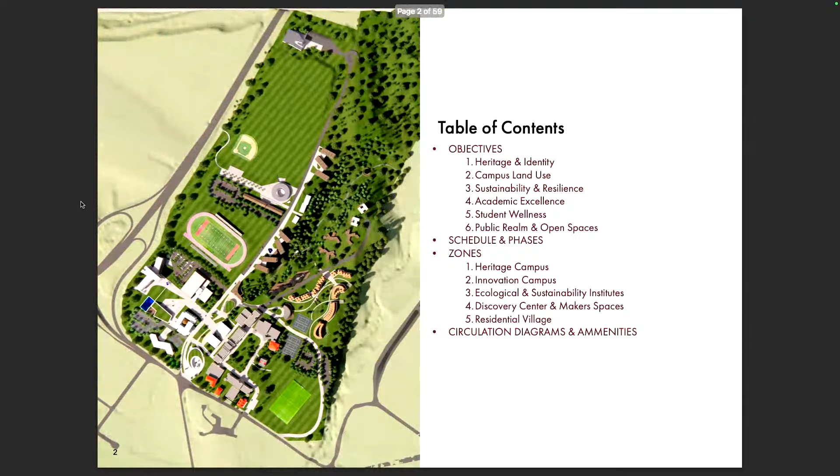Here's the overall plan. The basic objectives of this master plan is to really keep as much of the campus as possible and to reintegrate it into a new campus. Our goal is to maintain the heritage and identity of NYMA, but then build upon it with a new campus.

That's going to expand to ultimately 1,500 students over the next 10 plus years to reinvigorate the school for academic excellence. One of the main things we want to say is that in expanding the school, we want to be able to use the entirety of the campus, which is about 100 acres, to invigorate portions of the land that haven't been used before, to activate the natural landscape that's there.

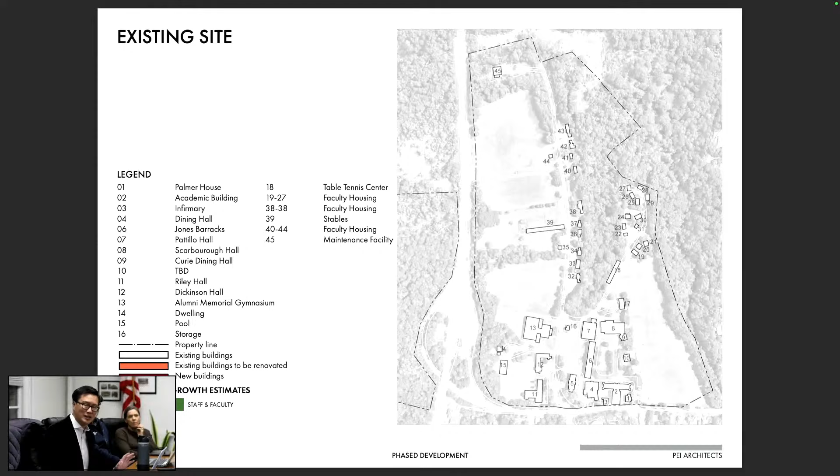As well as to reinvigorate or rebuild what is now being used as a campus but has fallen into disrepair. This is the existing site. Many of you know it because it's been here for many years. The existing site really is the main campus at the south half of the site, and then there are many houses and small faculty buildings to the north. The overall population right now is 50 students with about 20 faculty.

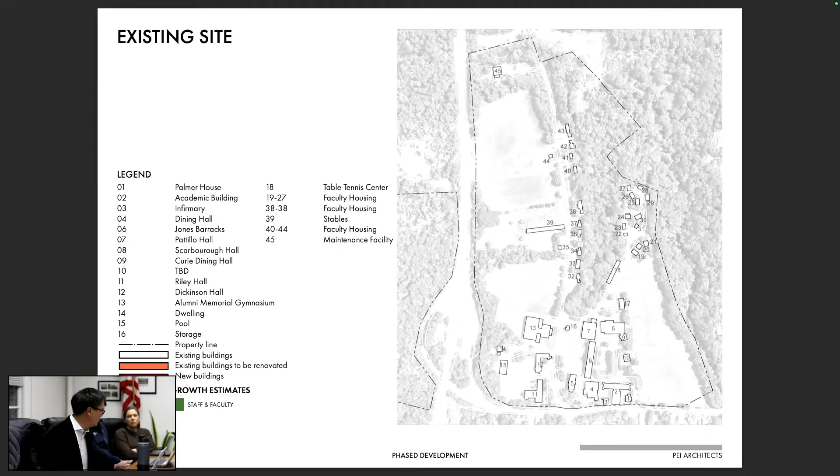The master plan itself will do two things: it will raze some of the buildings, but also restore many of the existing academic buildings. So in phase one, what campus wants to do is renovate those main campus buildings that are at the south, that are in orange. Those are being started now, and at that point, in the next 2 to 3 years, they want to increase the student population to about 200 to 300 students.

In addition, they would want to start building some of the buildings that we are proposing, shown in red there: the student center, which is behind Jones Hall, and then one extra dormitory building to the north, which would accommodate the additional students.

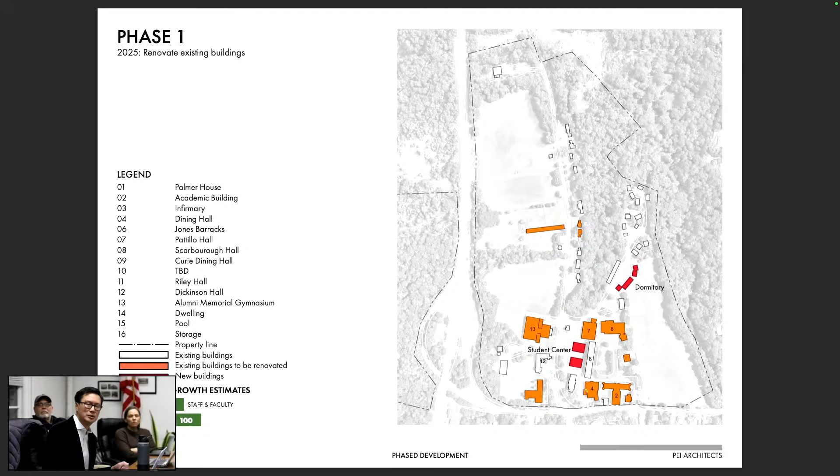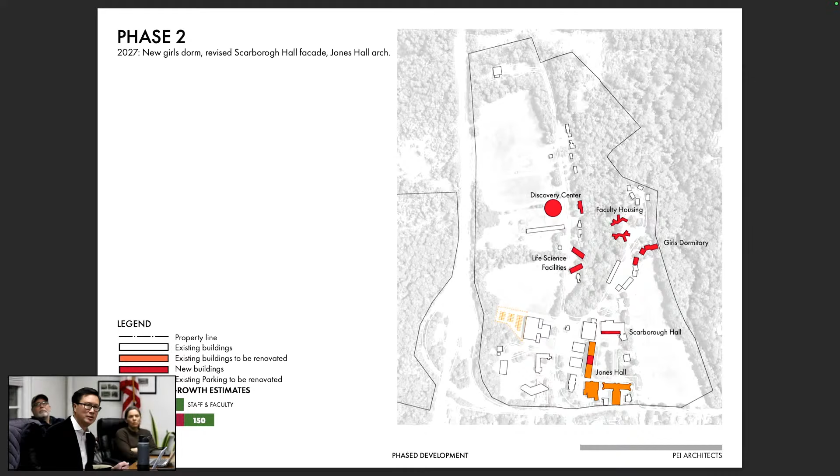Phase two, which goes on starting maybe 2027, 2028, they would continue to renovate those buildings around the main quad at the bottom of the screen, which includes Jones Hall, the academic building, and the dining hall. In addition, they'd add additional classroom spaces in the Life Sciences Center and the Discovery Center, which I'll explain later, in addition to more housing to accommodate a student population of about 700 people and 150 staff.

Phase 3 would then increase the student population to 1,000 students with 200 faculty. This is a blend of boarding and day students, mainly boarding. In addition, we are continuing to build additional classroom spaces, shown dotted along in red, starting from the main entry at the Innovation Center all the way up Faculty Road to the Life Sciences facilities at the North End campus.

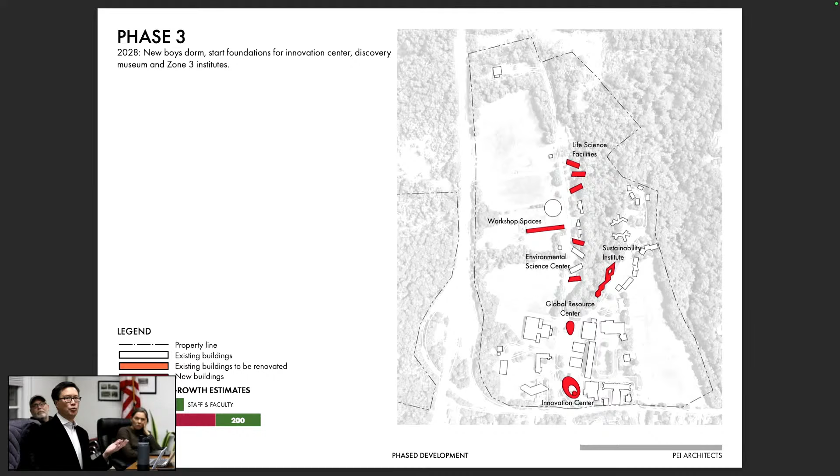And finally, phase 4 would be the culmination of the master plan, which includes all the final additional academic buildings, including the main academic building on the west, and a couple of museums at the southwest corner.

All new buildings are shown in red, including the addition of all the dormitories to accommodate the final student population of 1,500 students and 400 faculty. This is the projection for 2030, 2035, so 10 years from now.

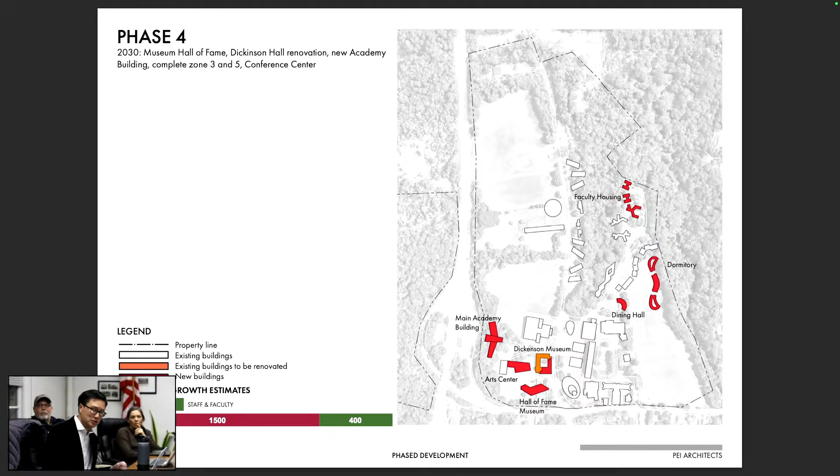And finally, at the very top, there's also discussion for a conference center or community center site, to be used not only for the school but also for the town itself.

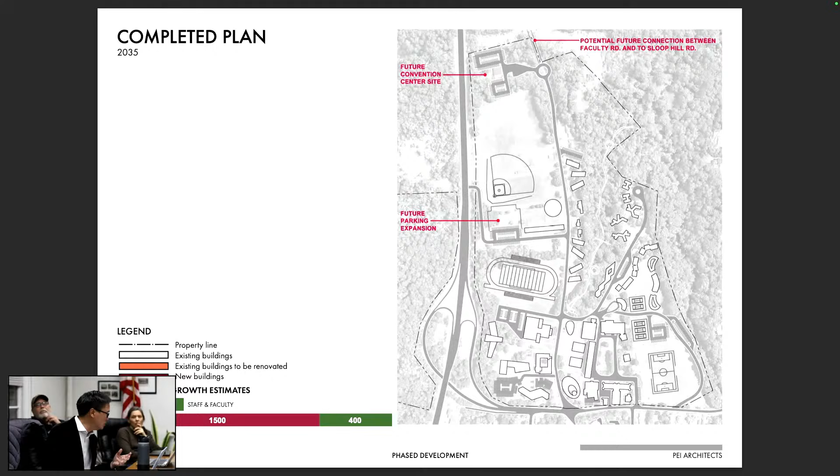So when we finish this project, the vision is to divide the campus into 5 distinctive zones. What you just saw was the phasing plan of how we want to build over time. But when it's completed, how is this campus organized and used? We envision it as 5 distinct zones, each with its own character.

Zone 1 is the original campus, the heritage campus, which we want to renovate and restore.

Zone 2 is the main new campus, shown in blue to the west of the existing campus. That's the new science and technology, or innovation, campus. It'll be marked by much more modern architecture, a freer arrangement of buildings, and more open spaces.

Zone 3 is the ecology and sustainability institutes they plan to install. That's taking place in a natural valley or creek in the middle of campus, a forested area that's currently unused. We hope to make that the life sciences and sustainability institutes, nestling the buildings within the forest to create another distinct zone within the NYMA campus.

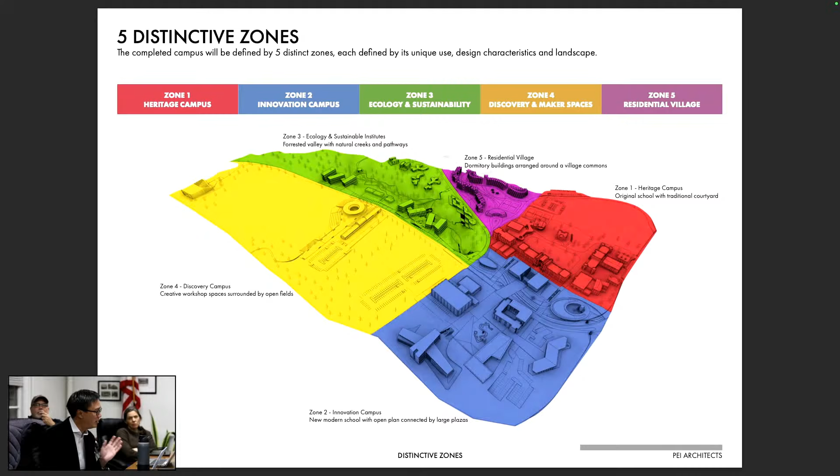In the diagram, we still want to maintain the Heritage Center, or main campus, as the center of campus. That's where administration and the main buildings will be, but from there we will be expanding the road network and paving network to incorporate all the new zones.

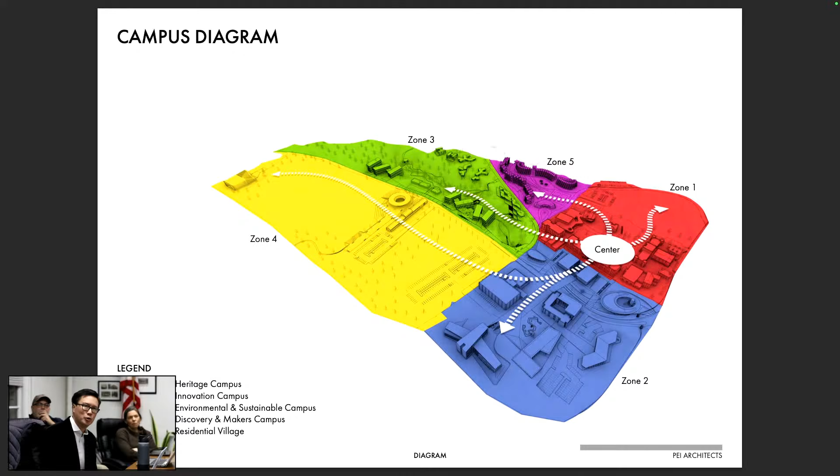We're doing this by adding to the existing roads, widening them, but also adding new spurs going east and west across the campus.

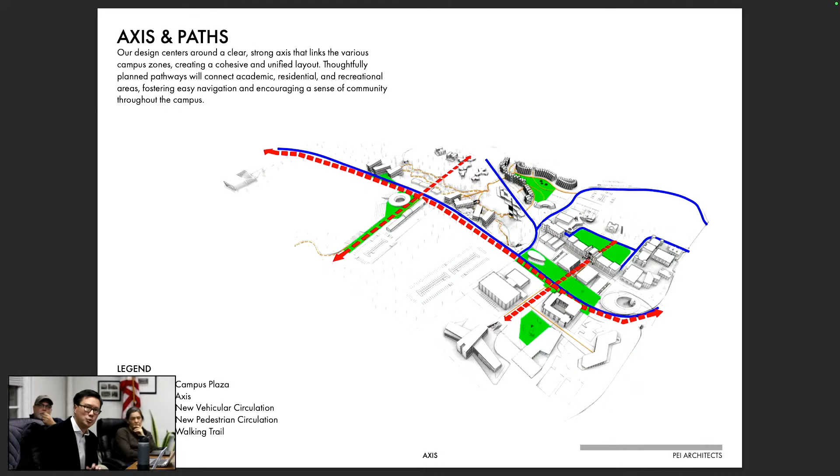One of the big problems right now is the campus is oriented in the north-south direction. We want to facilitate movement east and west across the valley, which occurs naturally in Zone 3, and also through Jones Hall. If you look at the axis between our new Zone 2 and Zone 1, we're recreating an archway through Jones Hall to create an opening between the two zones, which currently does not exist.

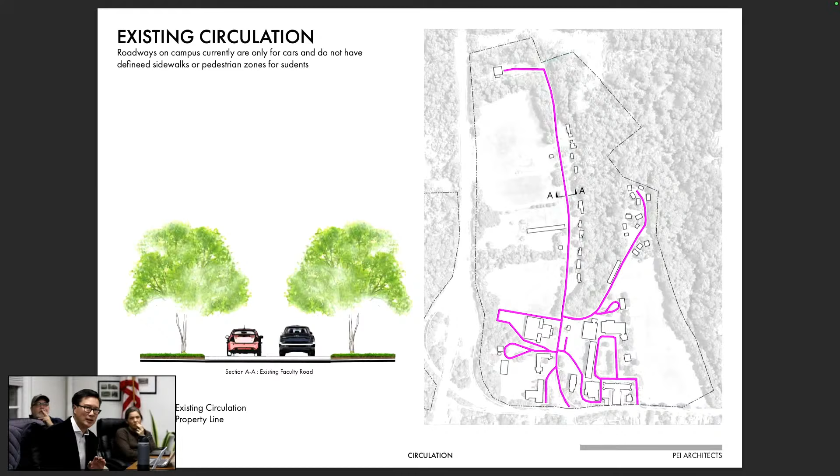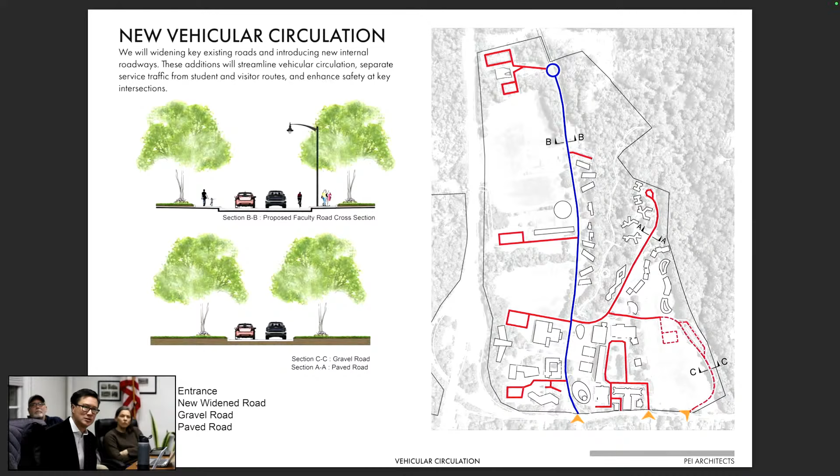What we plan to do in the expansion is create a new wider road on Faculty Road, which runs north-south through the campus, shown in blue. All the red roads will be arteries maintaining the same width as the existing paved roadways. In addition, in the bottom right-hand corner, a dotted line shows a new service road, a gravel pathway connecting to the existing roadway system, which will also just be a 2-lane road.

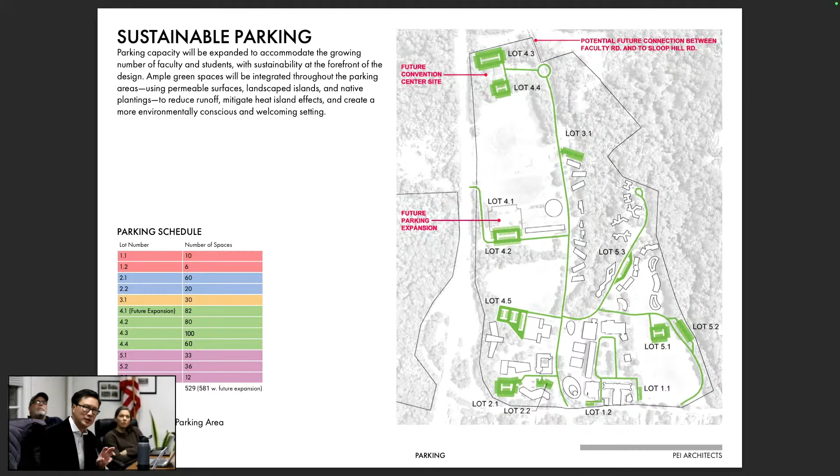We're also adding parking, which will be done on an as-needed basis, based on the needs of either the offices or the dormitories. The only place that will have a large amount of paved parking area is the North Convention Center proposed to be used with the town, though that will depend on how many seats or how large the auditoriums are. That's the only place where a high concentration of parking will really be needed; the rest will be determined by the student and faculty population as it grows.

In fact, since this is a boarding school, there's really not that much parking required from the dormitory areas, more for visitors and faculty. So right now we're proposing about... how many parking spaces, Ali? About 400? A little over 500. 500, I'm sorry, all told.

What we hope to do is that the parking is not all going to be paved. We're very conscious of adding too much paved area, so only the main parking lots are proposed to be paved. The rest, as we go further north or in areas where there's not so much car traffic, will remain either gravel or permeable soil.

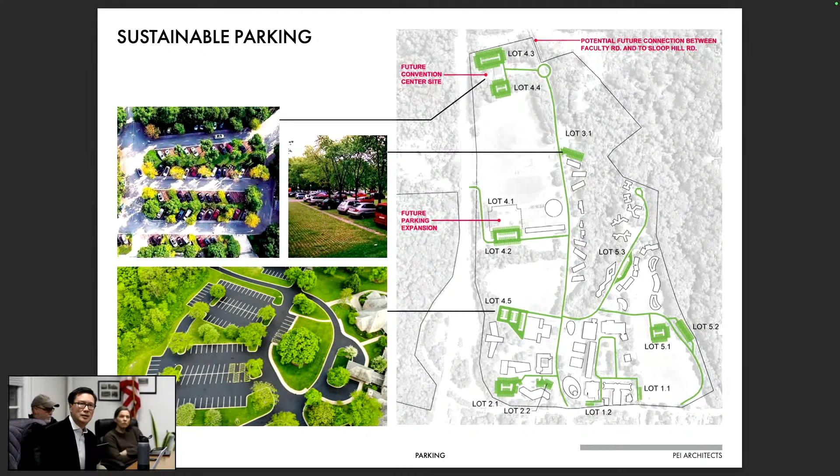In addition, you can see all these green areas within the circulation system. We're adding a lot more plaza areas and green spaces. They'll be accessible from sidewalks and the roads.

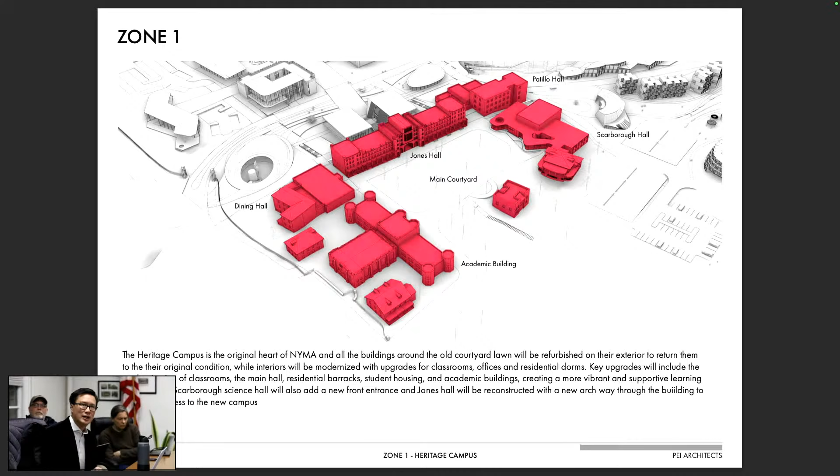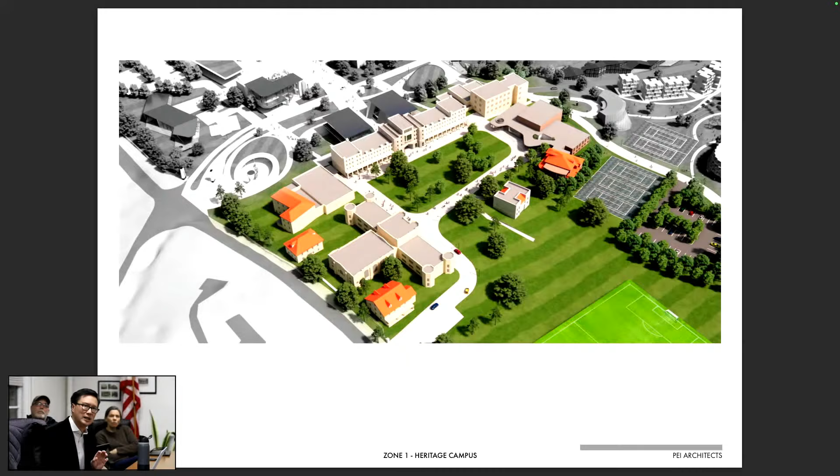We just want to go through each of the zones now. As I mentioned, there are 5 zones. This is the original zone, the original campus. As we said, we want to maintain its historic character. Jones Hall currently, which you see in the bottom right-hand corner, is a bar building right now with no perforations through it. What we want to do is create, if you can see on the top of the axonometric there, a central archway which will connect the existing courtyard to the new campus to its west.

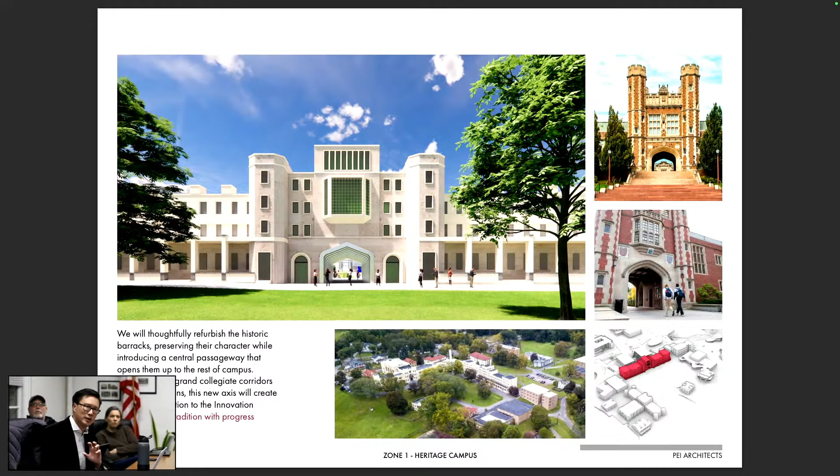This archway we're proposing would resemble some of the Gothic arches you see in a lot of the boarding schools or colleges around here, and that really provides a large opening that connects the two courtyards of the old campus and the new.

In rebuilding that central portion, which is currently a dorm, we would propose that area become repurposed for school clubs or more public functions rather than just dormitories. Since we're building new dormitories elsewhere, we can give up some of the dormitories currently in Jones Hall.

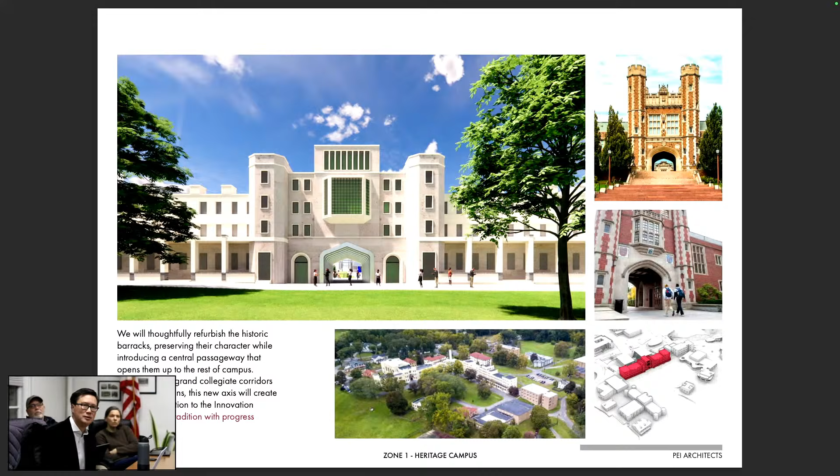The only other addition we're proposing for Zone 1, the old courtyard, is the revamping of Scarborough Hall, their science building to the north. You can see in the bottom right-hand corner that's the building at the north end, in red there, on the north side of the campus. We just want to create a new entrance for that place, something small but modern, in keeping with the scale of that courtyard.

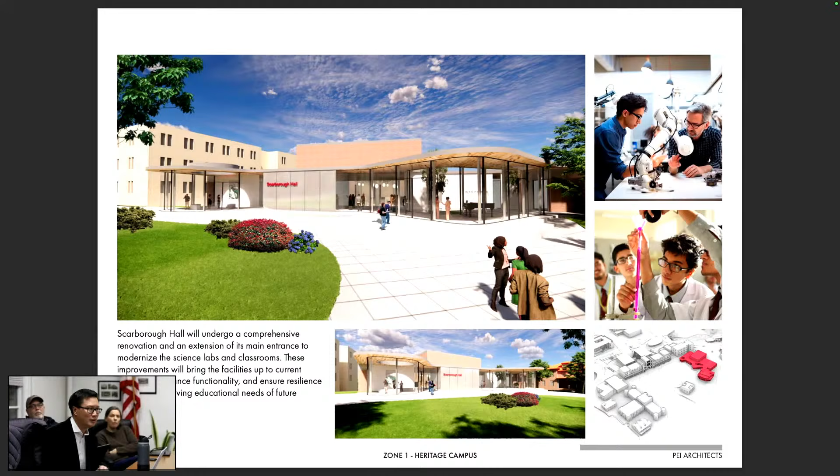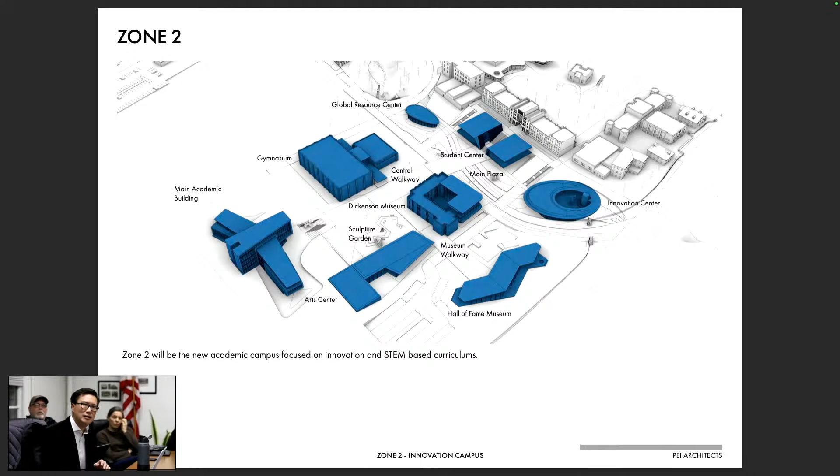Now in Zone 2, which is to the west of the original courtyard, we're proposing all new buildings, all new organization, but what we want to keep is Faculty Road, the roadway running north-south through the campus. That is going to be the main artery through the NYMA campus. So you can see in this zone, this is the innovation campus.

This is all the science, technology, and STEM buildings. The buildings we're proposing here are very modern, very open and glassy. They will be places where students congregate and come to during the day. This is the new student center here, which is on the axis with Jones Hall. This will be the main axis by which students go through from their dormitories to the main academic buildings here on campus now.

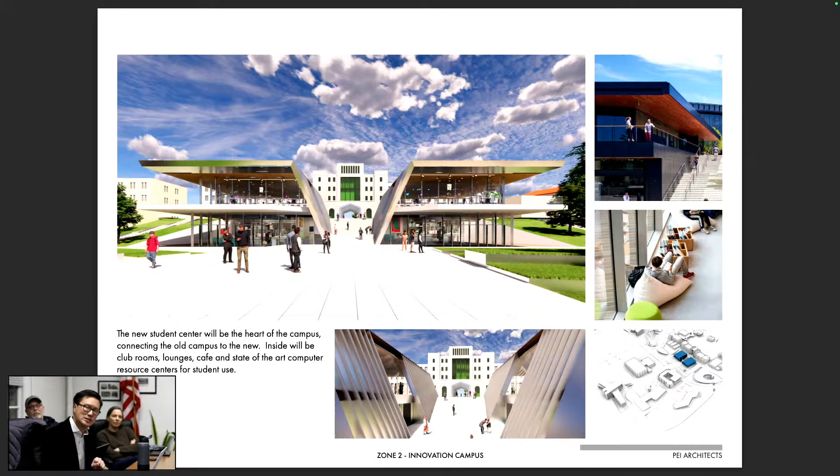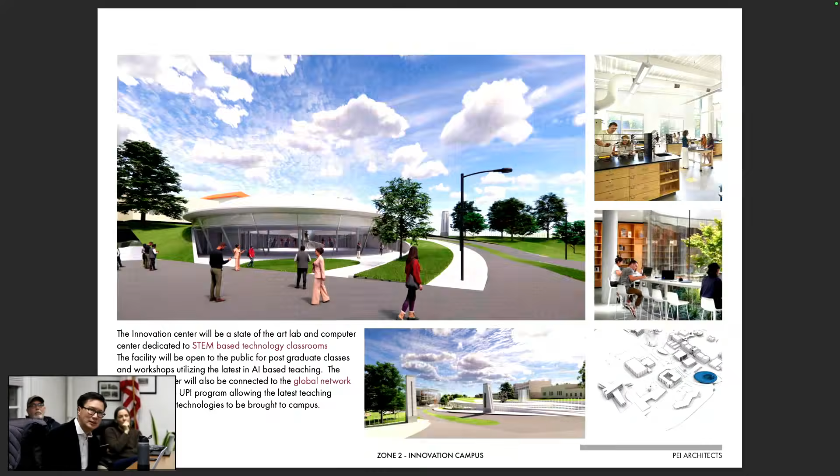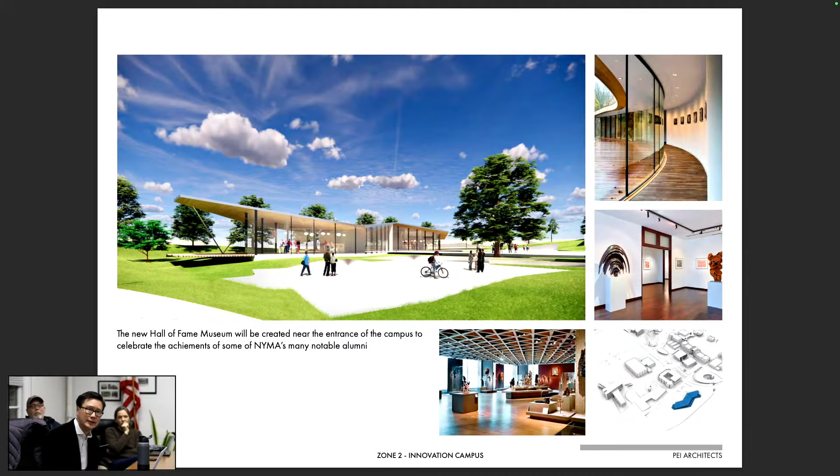This is the new Dickinson Museum, actually a new glass atrium built out of the existing Dickinson Hall, which was an old dormitory. This is the Hall of Fame Museum, dedicated to all the notable alumni of NYMA. You can see all the buildings are low scale.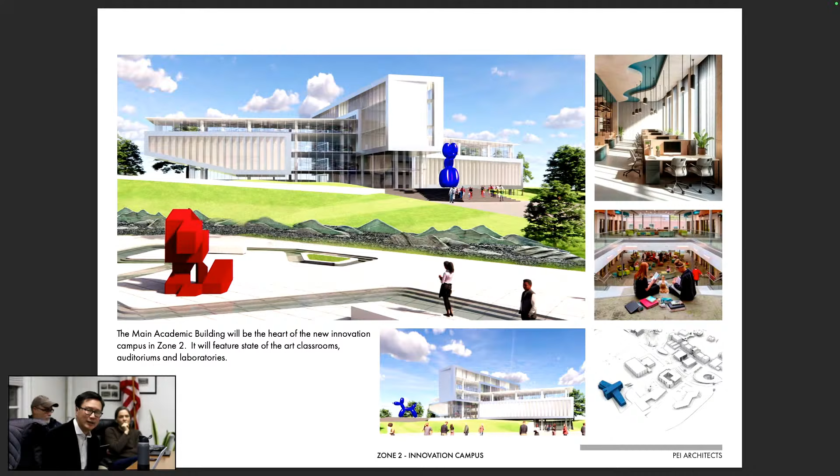They're all about 3 stories, except for this, which is the main academic building. This will be a 4-story building, at least proposed, and will house all their new labs, state-of-the-art classrooms, and auditorium—one of the main academic buildings on Zone 2. Zone 3, as we were saying, was the new Sustainability Institute or the Life Sciences Studies buildings.

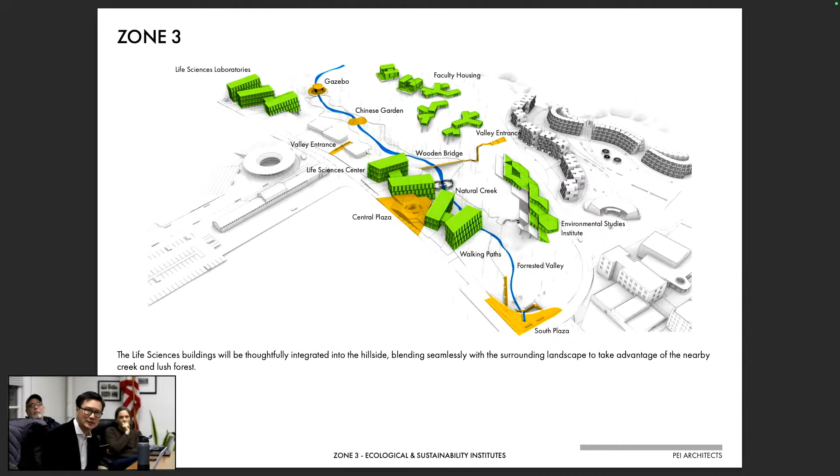This one is, as we said, built into the natural creek and forested area in the middle of the campus, so it's going to have a very different feel from the rest of the buildings.

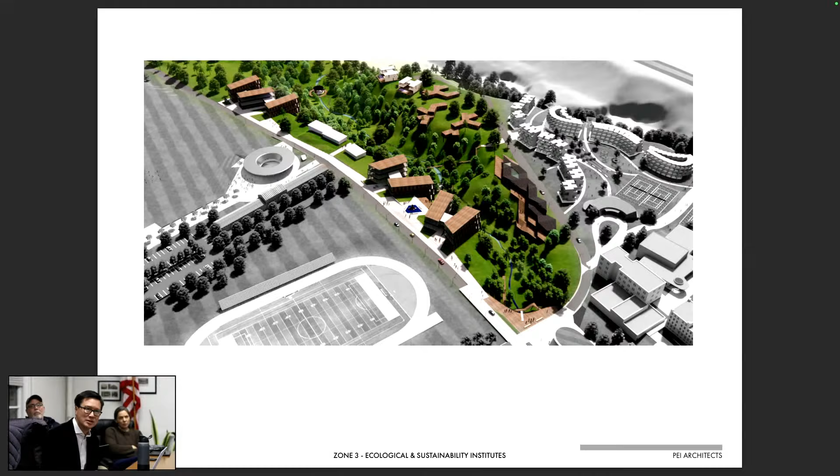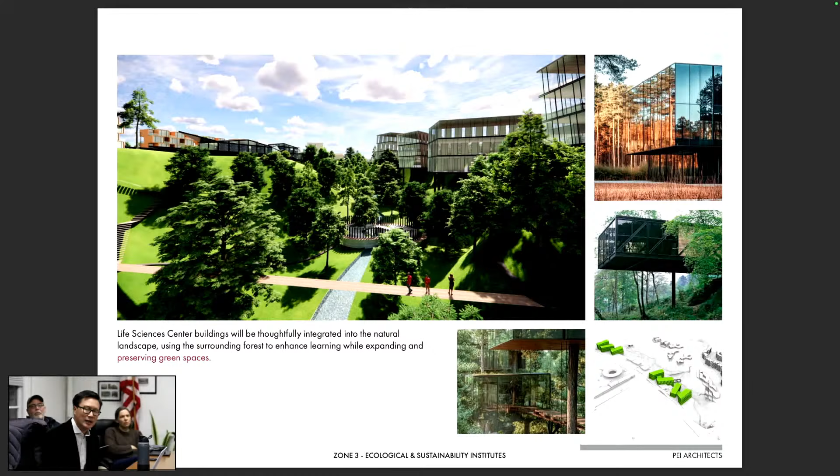You can see the buildings are perched along the perimeter of the valley there, with the creek in the bottom. The buildings themselves will be nestled into the forest. Again, this is an Ecological Sustainability Institute and Life Sciences Center, so we thought that was appropriate for these buildings to be in this environment.

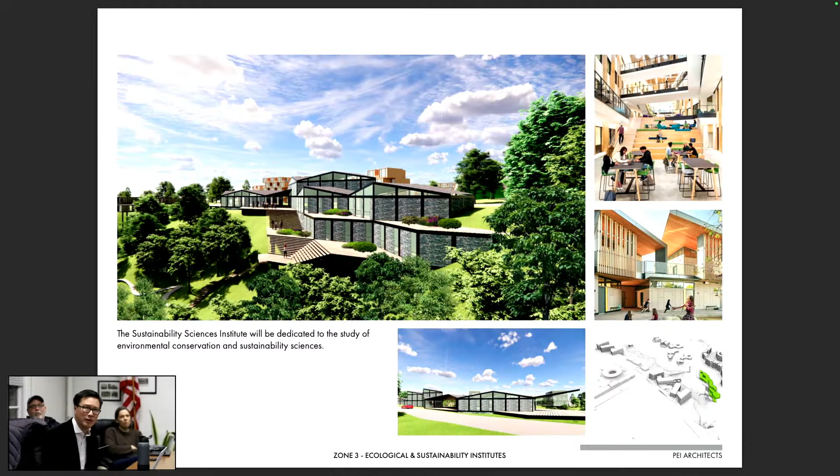We are also building pathways into the forest. Currently, the forest is inaccessible, but by building these buildings with walkways down into the forest, down to the creek, we've created a whole new zone that's accessible to the students, as well as a method for them to cross across the campus along the north end. You can see how deep the valley is here.

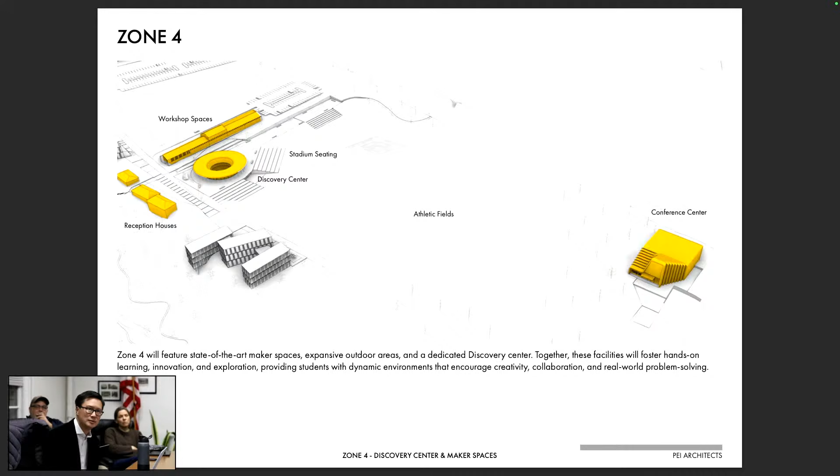They can display some of their built goods. The athletic fields that are in between the conference center and the discovery center, the round building there, will remain as athletic fields. They will also be the main fields used for the summer programs that are proposed for the campus. And you can see here just the rendered view.

And this is the discovery center there. This is an exhibition hall with workshops below. Again, this whole Zone 4 is dedicated to the physical making of either experiments or projects that the students are working on outside of their academic classes.

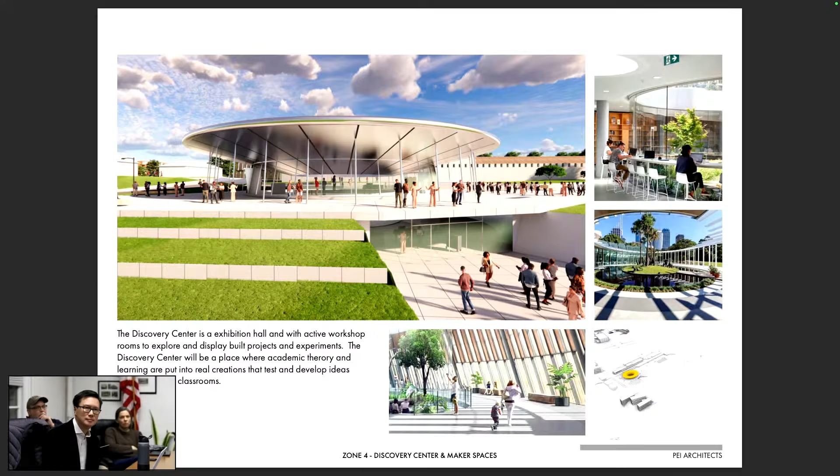And that's on the left there. The bar building is the old stables, which are now renovated into physical workshop spaces. We imagine inside those spaces mill shops, carpentry rooms, CNC machines—all these laboratories for them to build.

This project is the conference center that is still being discussed here, so we don't know how large it is, but we imagine it to be a very public building that's used both by the students and the town.

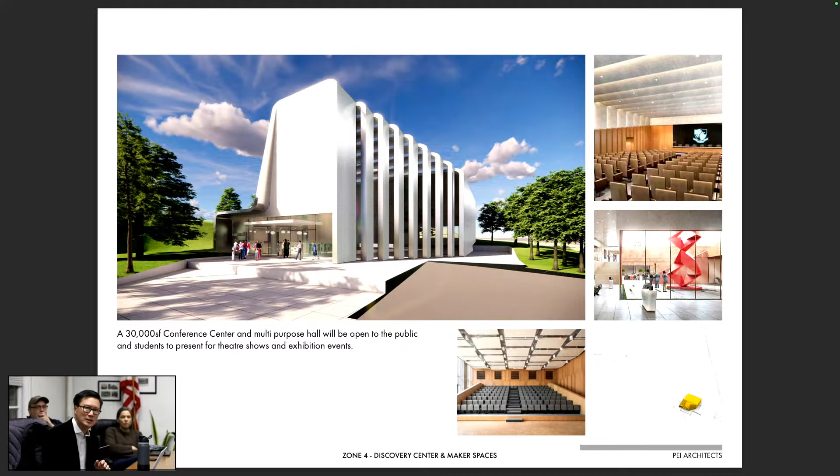But as you can see, with the system that we envision, we will create the campus and it will grow as the students and the population is needed.

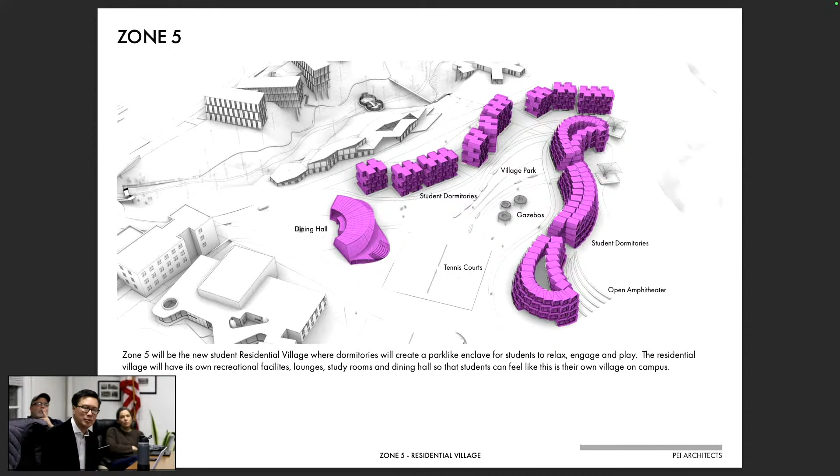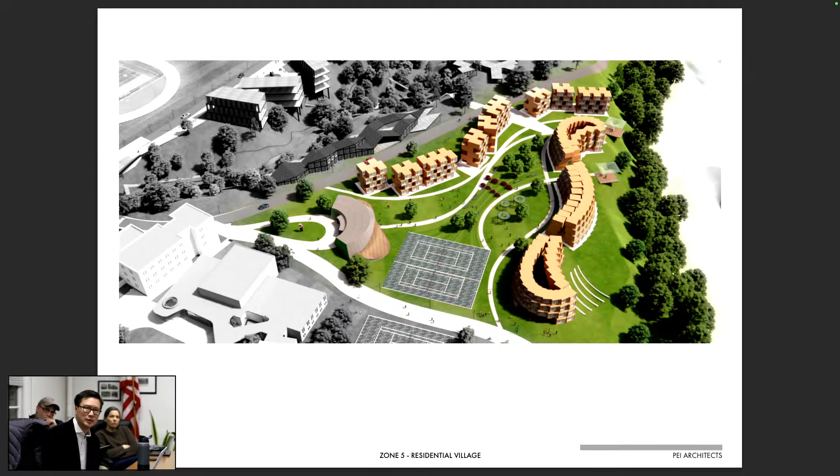The idea of this is to create a sort of enclosed village or residential zone for the students. They'll be here on weekends and after hours. There's a dining hall to the left. All the recreational facilities are around there, including the tennis courts and access to other outdoor plazas. The idea is to create just an enclosed courtyard zone for the students themselves that's off and separated from the campus.

And this is the dining hall. These are the enclosed spaces between the buildings here and the facilities that they have.

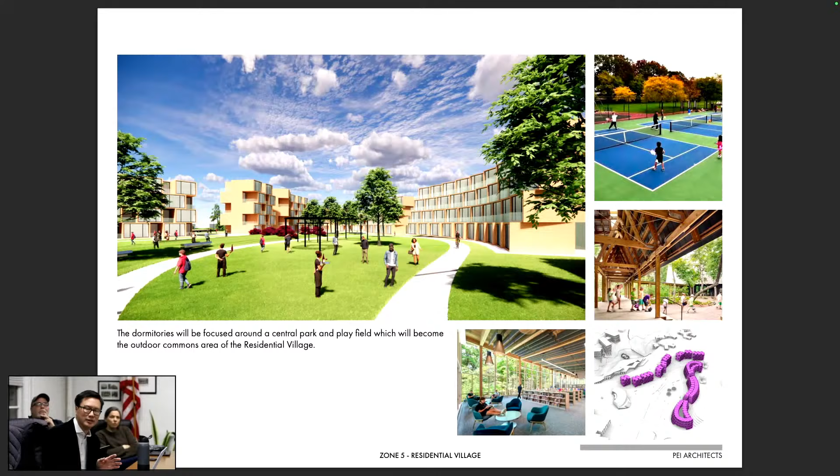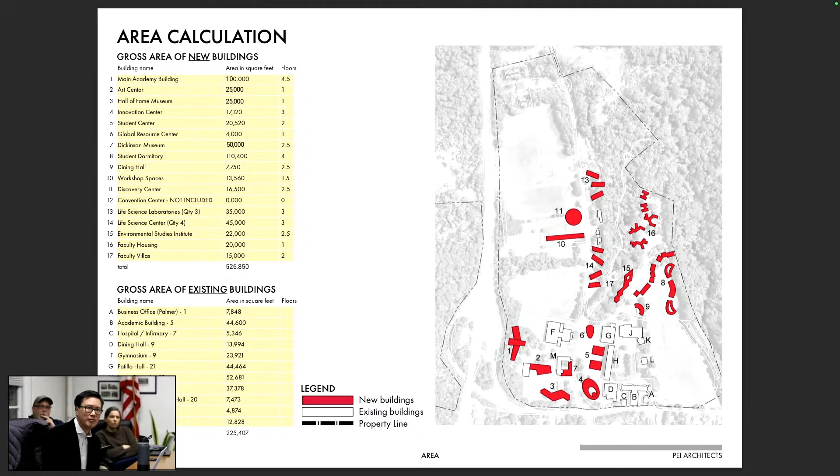So in terms of overall area, we're talking about a total of new buildings, which are in red, about 525,000 square feet of new construction. The area of the existing buildings that will be kept and renovated totals about 225,000 square feet. So that's 750 to 800,000 square feet of total building area on this site.

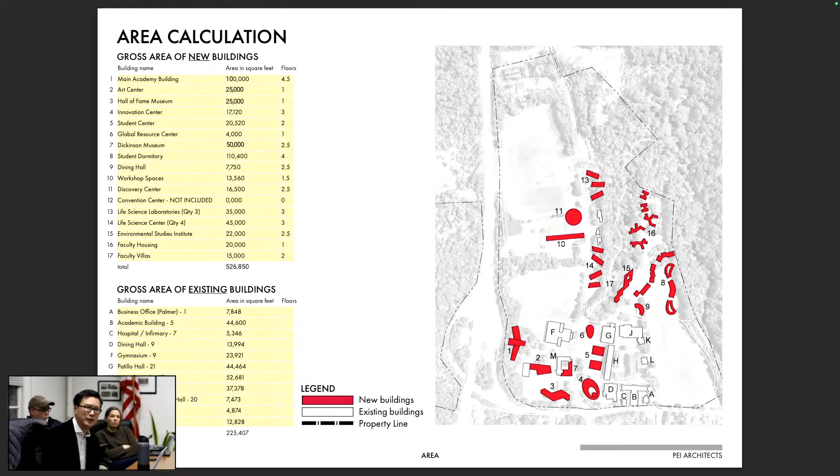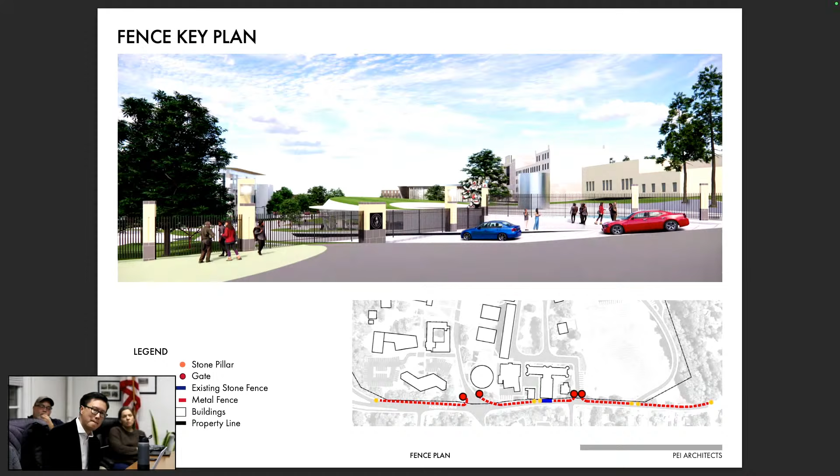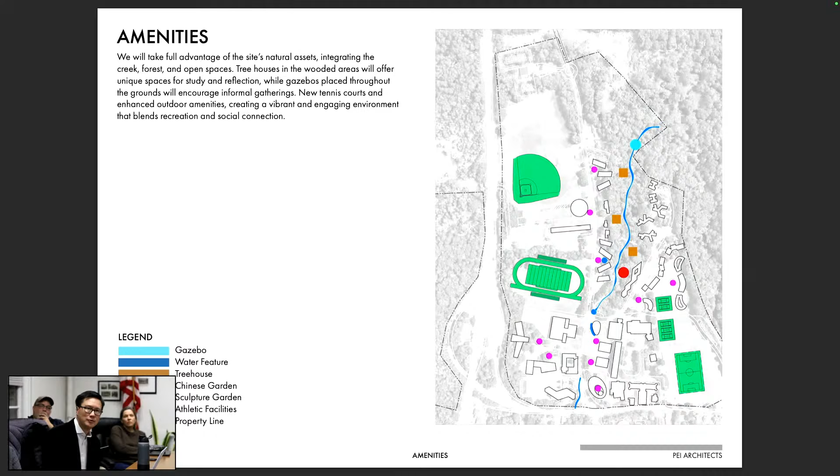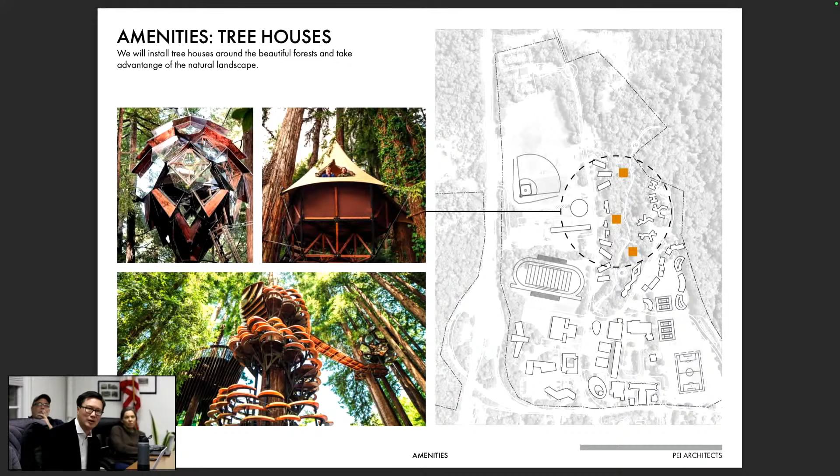Within Zone 3 in the Forested Creek, we're proposing other amenities for the students: tree houses that are interspersed among the walkways, and small enclosed garden areas.

The client has asked for small little gazebos for contemplation and just private areas for students.

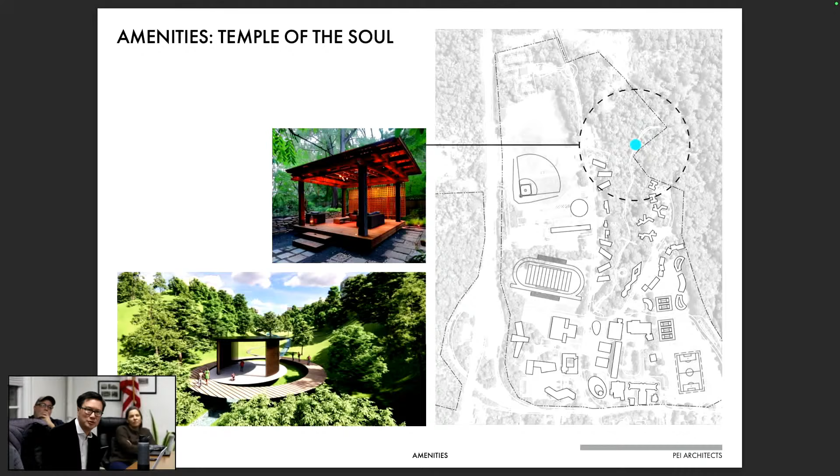We've used a lot of water features throughout. What we hope to do is to unite the entire campus through a series of water features that start at the south near the entrance and wind their way through the campus and then ultimately to the natural creek that's in the valley there of Zone 3.

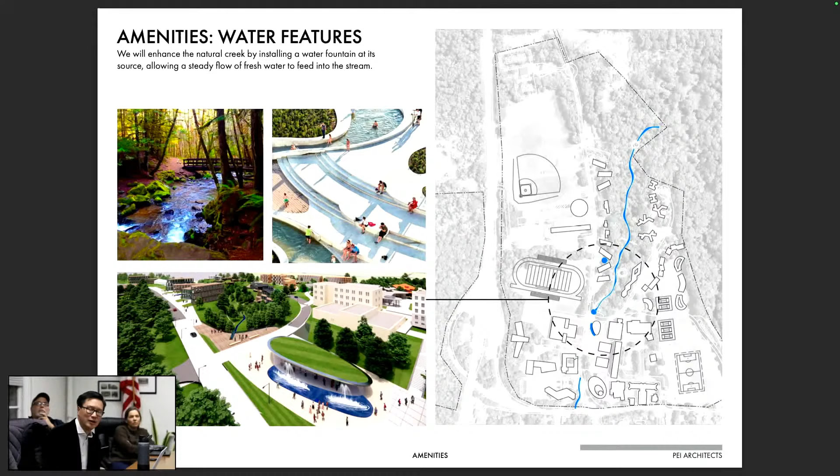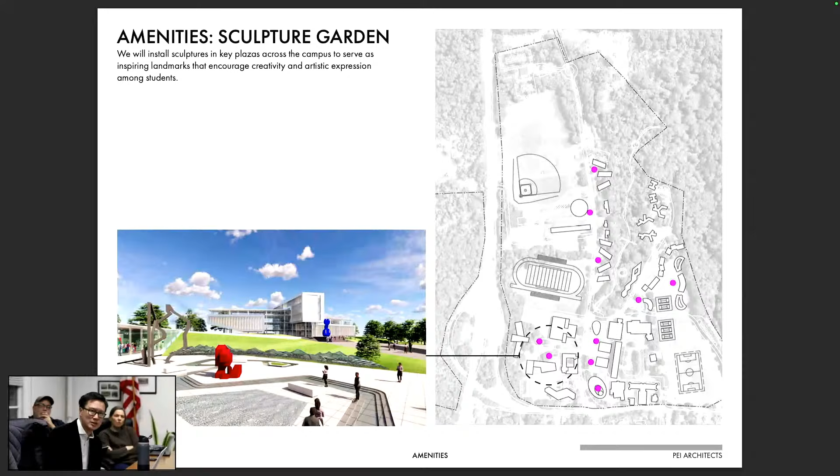As well, we've talked about the addition of the athletic facilities through the existing meadows that they have. Along with the water features, we will be having sculpture in a lot of the plazas that we're creating as, again, a unifying element throughout the campus. And that's it for, in terms of the scope of the master plan.

And these are just overall views of the final state. This one looking from the northeast, and then this one looking from the southwest.

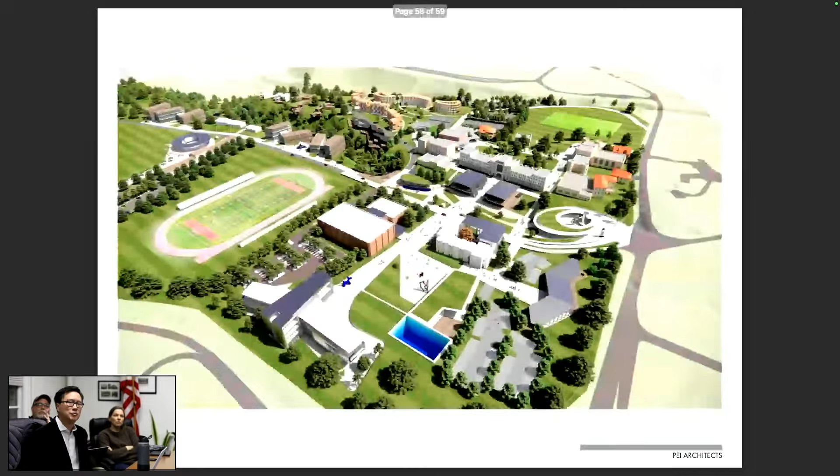That's ambitious. And exciting. And I appreciate you sharing it, both with the committee and members of the public who are here. If there are questions, we ought to take advantage of the fact that they're here and ask them.

And if not, you can always funnel the questions through the comp plan email, or you can send them to the supervisor. I'm sorry, Josh snuck in while we were. No, you can feel free to. So can we ask some questions?

Yeah, I have a question. Of course. I got a list. I took a couple notes, but I have a question about Zone 2 because it looked like that was the area where all of the buildings were going to be new, and there are a lot of buildings there currently, right?

So are there two pools, right? There's the gym that has the pool, but I know that pool is not functioning, and then there's the pool across the street that is functioning and working. And the gymnasium's pretty nice, the floors are really nice in there.

Yeah, I glossed over that, but so would all of those be taken down? So what's being kept is the gymnasium in Dickinson Hall. And then the gymnasium's being renovated and extended with a new entry, that's the proposal. And then Dickinson Hall, which is the old dormitory.

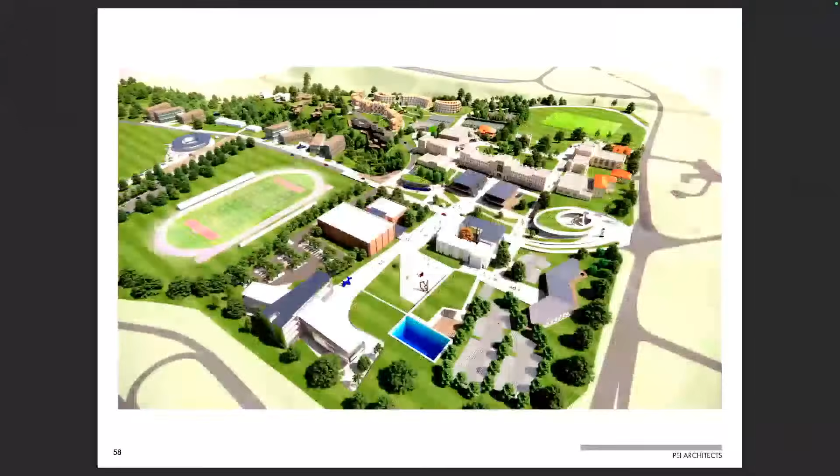So, to one point about that, parking spaces are limited because we didn't want to put too much coverage on the land, but we purposely widened Faculty Avenue so that it's essentially 3 lanes, with the idea that could be parking along the roads. That way we reduce the amount of actual asphalted parking area.

And so with parking, the cars are coming, and I'm not seeing any additional entrance or egress. At the moment, the majority of the people enter through Academy, and then up Faculty Avenue.

I'm just concerned with this amount of students and faculty going in and out, with really wonderful spaces proposed for sporting events and things like that. So you're gonna have school buses, teams going back and forth. Are you proposing entrance egress onto 9W?

Because a lot of this is facing 9W. Yeah, we're proposing that Faculty Avenue at its northern end connects to the streets up there, so it becomes an egress or access road, though it's a small road at the other end.

Right now it's called Scott's Sloop Hill Road - not a very large road. So basically you're proposing that most people coming to the campus for whatever activity would go via Faculty Avenue, having to leave 9W and go on Academy, working their way into the facility from there. Faculty Avenue would be the main entrance, which is why we're widening it.